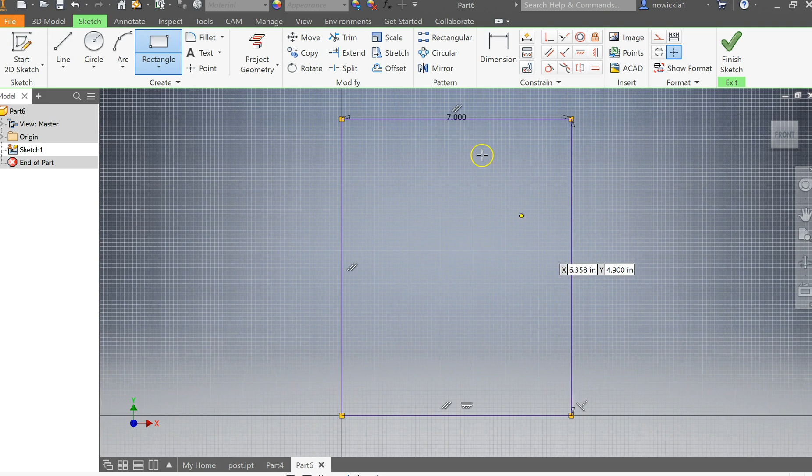I think I looked this up a while back. And then what we need to do here is create the arc point. So before we do anything else, now that we have the size of our rectangle, we're going to delete the dimensional constraints, so that we can add some other stuff in here.

So let's see, I'm going to pick my center point here. Yep, there's my dashed line. What I'm going to actually do is, this is 7 inches across, so I need to make a circle that's 7 inches and then do like a trim.

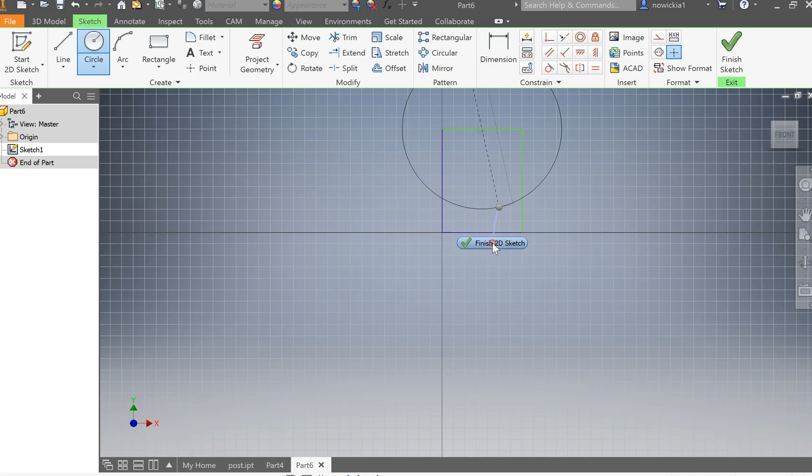So one way I can do that is go to my center here, click- oh, nope, not at all what I wanted to do. Trying to zoom out and I went too fast. So here's my circle. I'm going to wait till I get the green for my center point, set my diameter as that. But the next part I want to do, this actually makes the mailbox too tall.

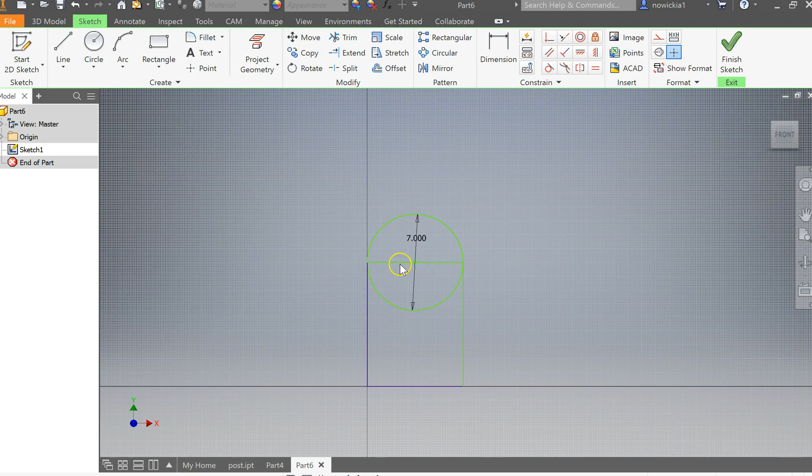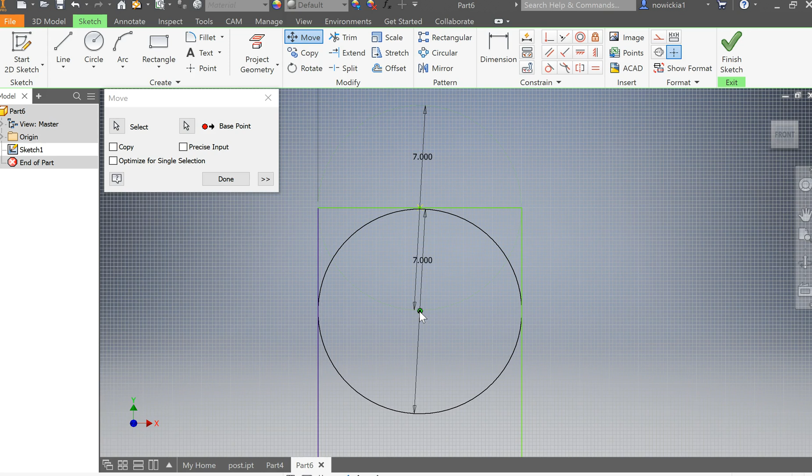So I'm going to do what's called a move command. Notice when I click here, it highlights the circle, so I'm going to click that. My base point, I'm just going to grab the center of it and then say yes to remove the constraints. I want to line it up so the edges touch the edges and the top touches the top there. And then I say done.

So you can kind of see the shape here, but there's a really cool tool in the sketch tool, it's called trim. Again, let me delete that dimension line. So when I click trim, what happens is in different points where lines meet up, you get this dashed line, and it'll trim away that line to give you what's left a different shape.

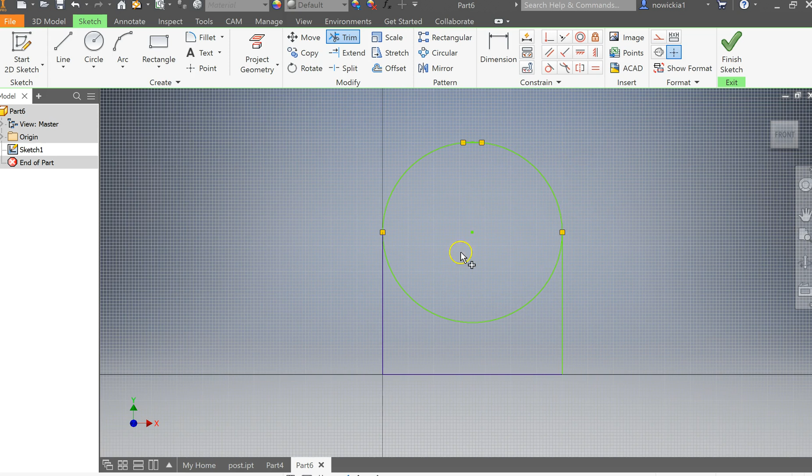Right, so now I have this. See, right now I still couldn't extrude this shape, but when I click this, now I can, and you can see it actually looks like the mailbox shape.

Let's see here. Good thing I zoomed in because I don't want this line here, that would have thrown me off. And you can highlight that - no, that's just the center point.

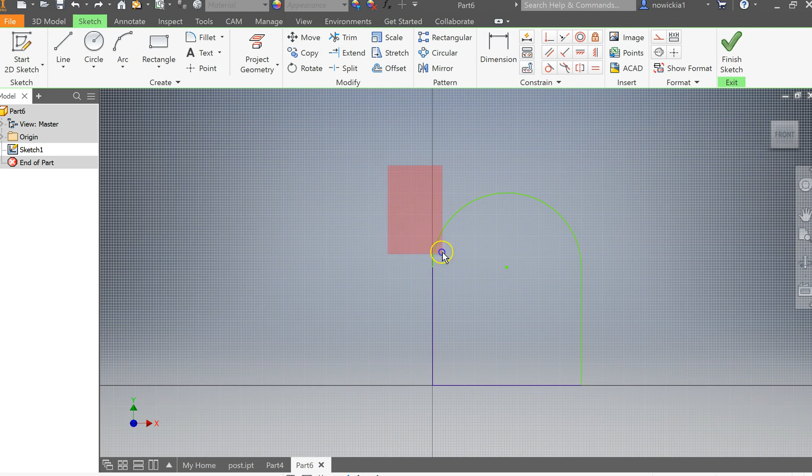Never mind. So at this point, what I can do is called an offset. I'm going to select this whole thing here, then click on an offset, click that shape, and come in about 1/4 of an inch.

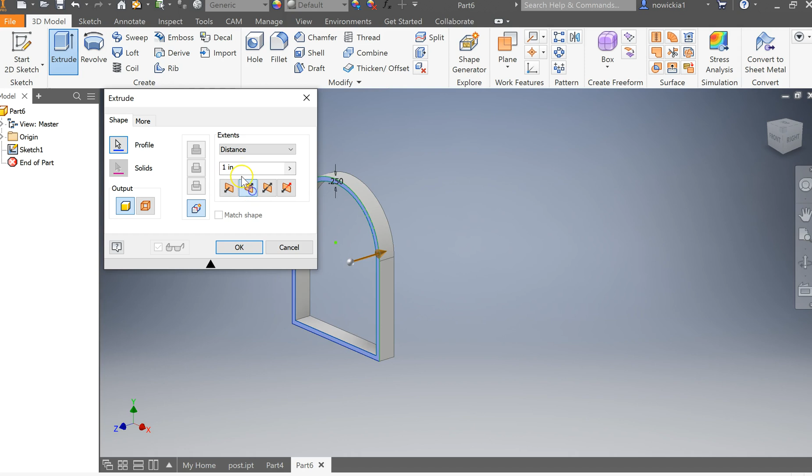Okay, and then I'm going to click Finish Sketch, and then I can extrude this. Let's go back probably about 20 inches. All right, so you could see the mailbox shape there. That's one way to do it, and that's probably the most accurate way to do it.

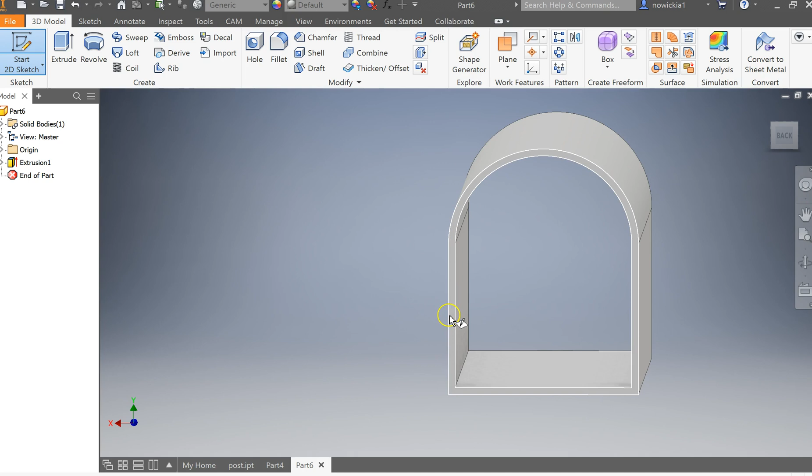So now what I can do is go ahead and add the back to that. So I need to add the back. What I'm going to do is click Start a New Sketch, zoom in, and I want this surface here. Be careful not to click one of these other lines - I want this actual surface here. And there's a really cool tool in the sketch tool called Project Geometry.

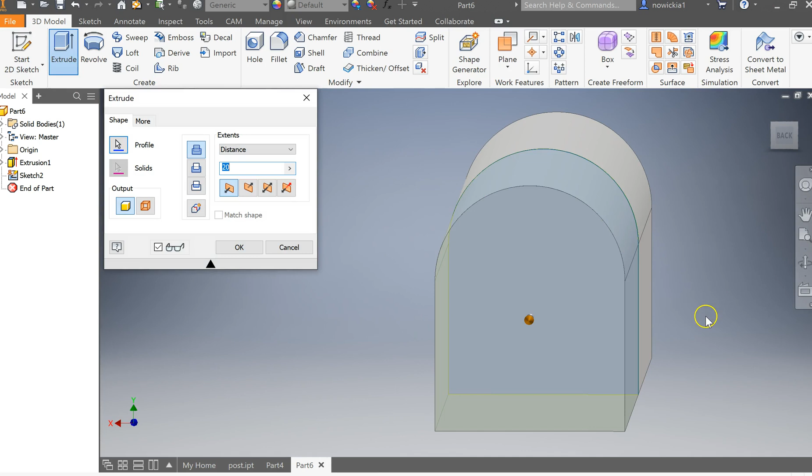So I'm going to take that, and I can click these different lines, and it'll take on that shape. So now when I click Finish and Extrude, I'm going to come back 0.25 and click OK. Now there's the back of my mailbox - you can see now I can't see through it anymore.

So I'm going to leave that as the mailbox. We could do the door on the other part, but I'm going to do that in an advanced video because there's some different things you can use, like planes with angles, and then do the sketch to the plane so it shows the door partially open and that kind of thing. You could certainly do the same thing where it shows it closed and add like a handle and stuff, or you could really fancy it up.

If you wanted to just add the door to it, you do the same thing we did for the back, and then you could emboss some text and add like US Mail and that kind of thing. But for now, we're just going to leave this the way it is.

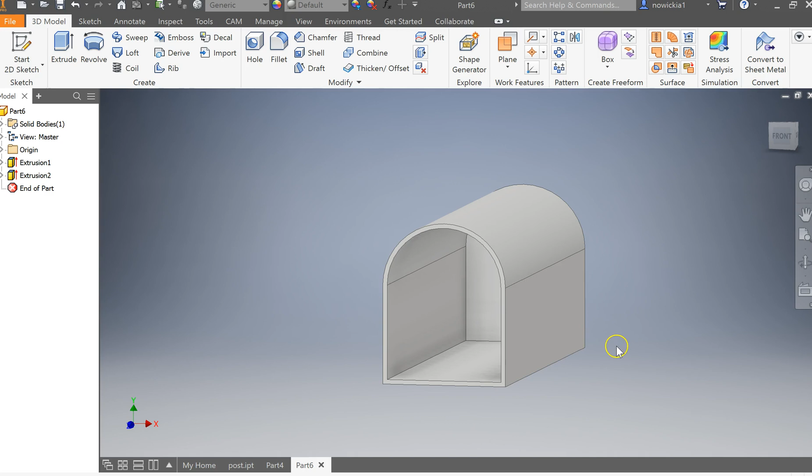I am going to add a sketch here though, and I'm going to add a circle because I want to add a connection point for the flag. So if I start off at 0 and say the flags are typically about 7 or 8 inches, let's see, this part here, it's about 5, so I'll come here. I'm going to tab in here and say 2.5, and then here I'll say 5.

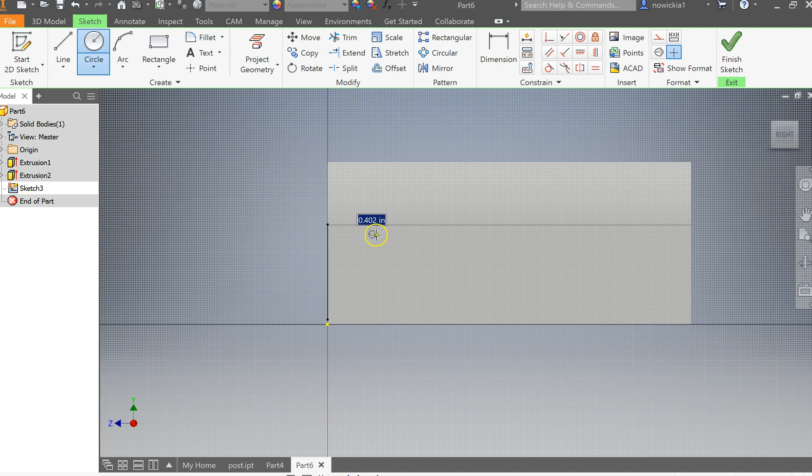Okay, so that'll be our good point there, and then I'm going to put in a 1/2 inch circle, and then click finish sketch, and extrude that so it cuts through that metal, and that'll be where the flag goes. Alright, so I need to remember that the size of that circle is 1/2 inch.

Okay, so I'm going to save this. We have the post, we have the box, and now we're going to create, in the next video, we'll do the flag.